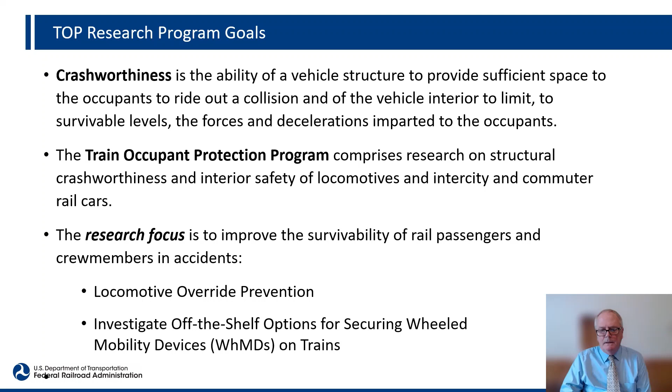Inhibiting override or underride is of concern to FRA. Locomotives are susceptible to override in train-to-train collisions due to their relatively stiff underframe structure compared to other rail equipment. Conventional anti-climbing structures can deform on impact and lose their vertical load carrying capacity due to fracture as they crush longitudinally. This can lead to ramp formation and increase the likelihood of override.

The photo on the left is an example of underride, in which the locomotive struck a standing train consisting of maintenance of way machinery at 23 miles per hour. The locomotive cab is crushed by the overriding freight equipment and the occupants were fatally injured.

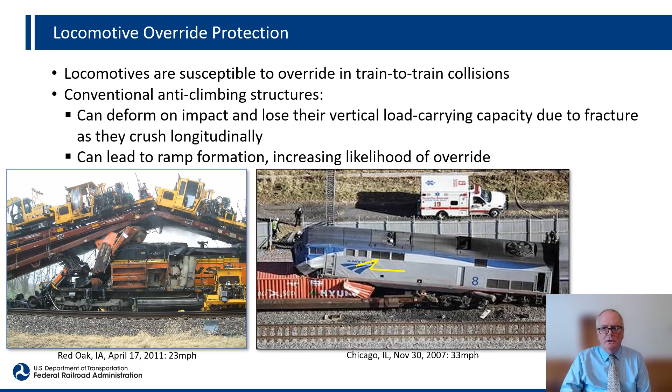The photo on the right is an example of override, where an Amtrak locomotive struck a standing freight train at 33 miles per hour. The yellow jagged line shows the shape of the underframe of the Amtrak locomotive, which deformed considerably, highlighting the forces generated in such collisions.

The purpose of our test was to demonstrate the effectiveness of two retrofittable crash energy management components on the front end of a passenger locomotive.

The components consist of a pushback coupler, which telescopes on impact to bring the vehicle ends together, reducing the potential for lateral buckling or override. The telescoping action is triggered at a load of approximately 675,000 pounds.

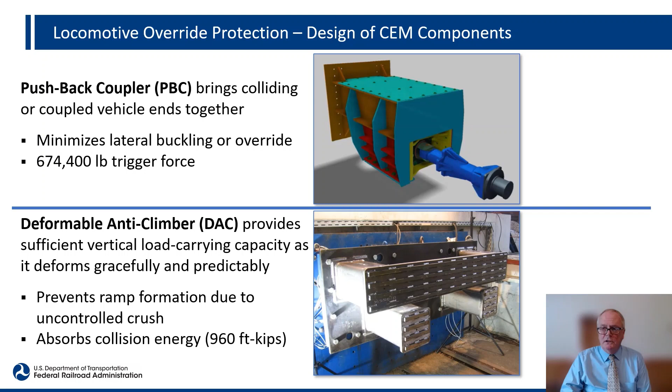The deformable anti-climber is a bolt-on feature with crushable tubes arranged at different heights to accommodate interaction with most types of rail equipment. The upper tubes are positioned to align with the underframe of locomotives, while the lower tubes engage lower floor passenger cars. In a collision, the tubes collapse and engage the equipment at the colliding interface vertically to inhibit ramp formation, leading to over or underride.

These photos show the results of testing and computer analysis of the individual components to confirm that performance met the specifications. The components were then installed on a locomotive and tested in two single vehicle-to-vehicle tests to further validate performance.

The upper left image shows the pushback coupler after impact, in which the pushback action forces a larger tube into a smaller one. Expanding the tube absorbs collision energy and causes the paint to strip off.

The upper right shows an overhead view of the deformable anti-climber. The top image is the collapsed test article, and the bottom is the computer simulation of the component test showing excellent agreement. The lower two figures show the sliding lug and the shear bolts.

Once the pushback coupler has been engaged and exhausts its stroke, the sliding lug is loaded until the shear bolts fail and the assembly slides backward under the locomotive.

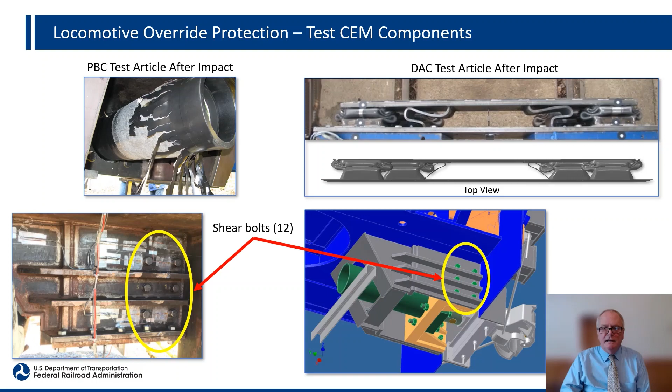This is a drone's eye view of the test, where we evaluate the performance of the pushback coupler and deformable anti-climber under realistic collision conditions.

The moving locomotive with the CEM components and two passenger cars containing the occupant experiments is shown here. The impacting train has been pushed up to speed and released at a location which will result in the desired speed at the impact location and approach from the left. The release point is slightly uphill and the train is traveling with no persons aboard.

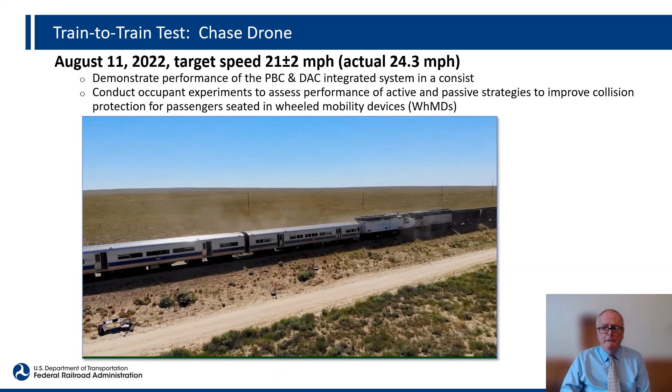The standing train is a similar locomotive connected to two freight cars. After impact, you can see that the two trains remain aligned, there is no indication of override, and the moving consists come to rest several hundred feet from the impact point.

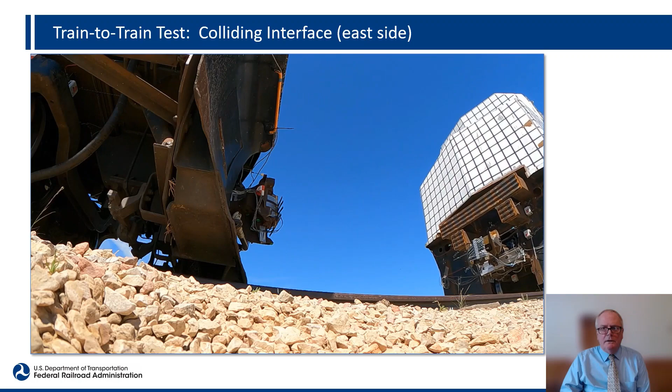This is a close-up view of the impact from a camera mounted on the ground. It's difficult to see, but this shows the couplers engaging, pushing back, and the translation of the sliding lug after the shear bolts have failed.

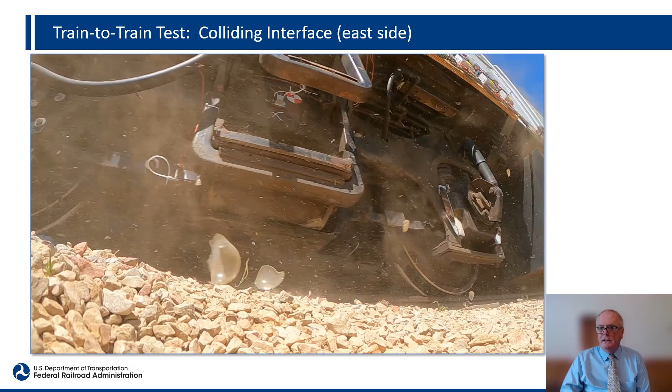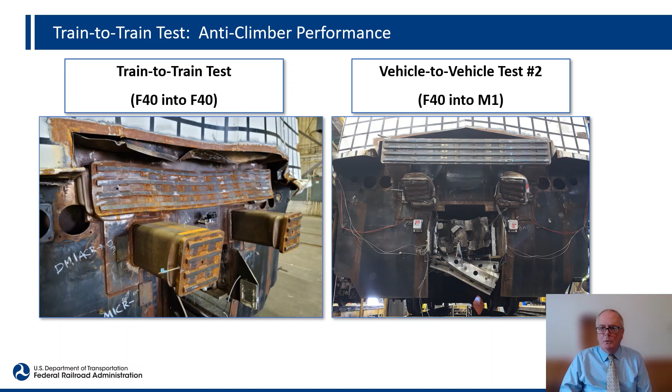Again, no evidence of override or impending derailment. These are views of the deformable anti-climber after the train-to-train test on the left and after the locomotive to passenger vehicle test on the right. This shows how the different sets of deformable tubes are engaged, the upper or lower, depending on the type of equipment involved in the collision.

Currently, there are no requirements for users of wheeled mobility devices to be restrained while riding in passenger rail cars. Effective securement or compartmentalization of wheeled mobility devices and the passengers seated in them can improve collision safety.

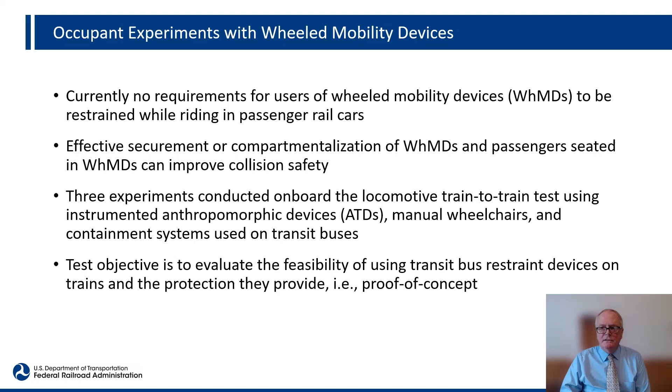3 experiments were conducted on board the train-to-train test using instrumented anthropomorphic test devices, ATDs or crash test dummies, manual wheelchairs, and containment systems used on transit buses. The test objective is to evaluate the feasibility of using these transit bus restraint devices on trains and the protection they may provide, just a proof of concept.

Since passengers travel at the same speed as the train, in a collision, passengers continue to travel at speed while the train decelerates. The speed at which a passenger strikes some interior feature is the secondary impact velocity. The larger the travel distance, the greater the secondary impact velocity.

Providing increased maneuvering space for wheeled mobility devices generally increases the impact velocity and the severity of secondary impact injuries during an accident. Therefore, it's recommended that passengers in wheelchairs are seated rear-facing with the wheelchair placed against a bulkhead wall or some other stiff structure to improve safety while maintaining passenger independence.

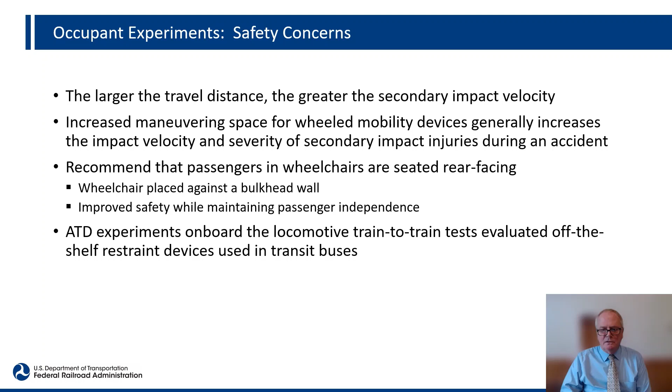ATD experiments on board the locomotive train-to-train test evaluated off-the-shelf restraint devices used in transit buses. The 3 experiments were arranged as shown here.

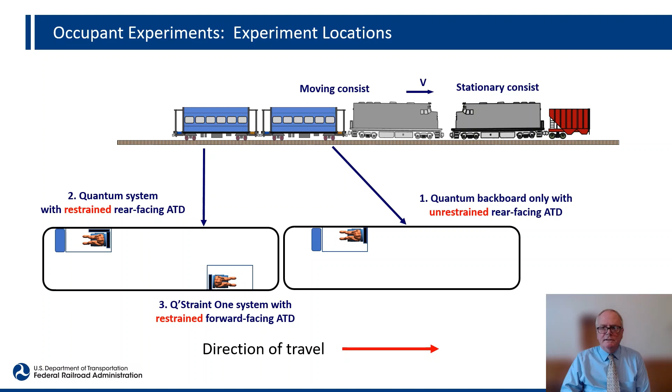The first is the quantum backboard only with an unrestrained rear-facing ATD. The second is the quantum system with a restrained rear-facing ATD, and the third is the Q'Straint One system with a restrained forward-facing ATD.

This is how the experiments looked before the test. The backboard-only option provides the most independence for the wheelchair occupant. No assistance is required to use this option. The ATD is seated in a commercial, off-the-shelf wheelchair.

The second experiment is similar to the first in that it uses the same backboard. However, rotating bars at the base of the backboard grasp the rear wheels of the wheelchair, and the ATD is restrained with a 3-point seatbelt attached to the chair and the car body.

The third experiment is similar to the second, except that here the chair is attached to the floor using J-hooks and straps. The ATD is also restrained with a 3-point harness.

Experiments 2 and 3 use what we call surrogate wheelchairs designed for testing, since the purpose of our test was not to evaluate the structural integrity of the chairs themselves. Also, options 2 and 3 will likely require assistance from a crew member.

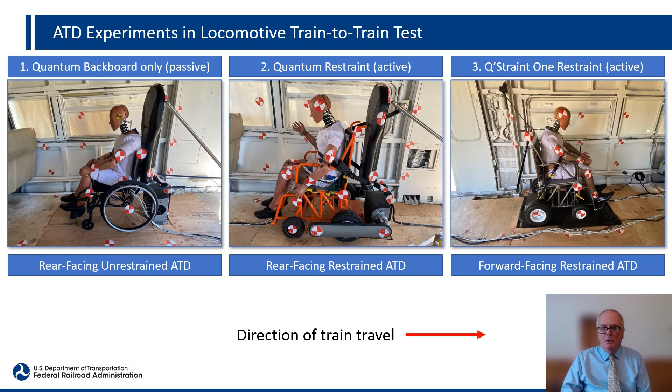This slide shows the response of the ATDs to the collision deceleration. The train is traveling to the right. The high-resolution slow-motion videos allow us to infer occupant motions during the collision.

As you can see, there is substantial vertical motion of the ATDs due to the passenger cars bouncing on their suspensions. However, all of the devices remained attached and the ATDs remained compartmentalized, meaning there was no excursion from their initial positions.

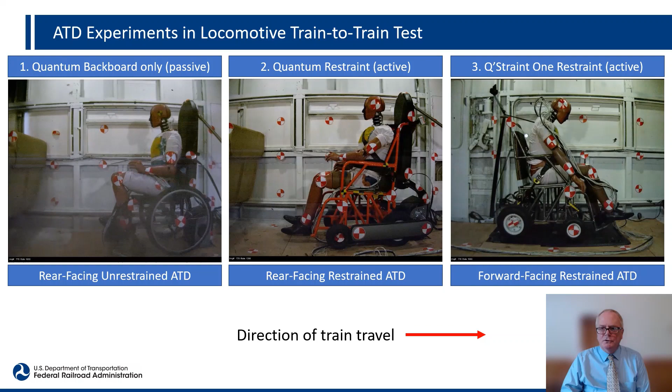The test results can be summarized as follows. The pushback coupler deformable anti-climber integrated system performed as intended. All the CEM components activated and absorbed collision energy as designed. The shear bolts failed, and there was no evidence of vehicle-to-vehicle override.

The ATD experiments were similarly successful. Wheeled mobility devices remained constrained throughout the collision event, and all the human injury criteria were met.

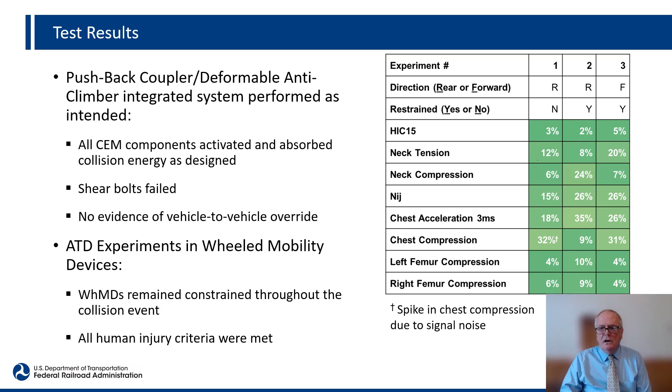The table on the right shows the applicable human injury criteria. Based on the sensors in the ATDs, we derived the injury metrics, all of which were well below the allowable limits.

The next steps for this project include a deep dive into the enormous amount of data that we collected during the test, and using the data to refine our computer models so we can investigate different collision scenarios that we were not able to test.

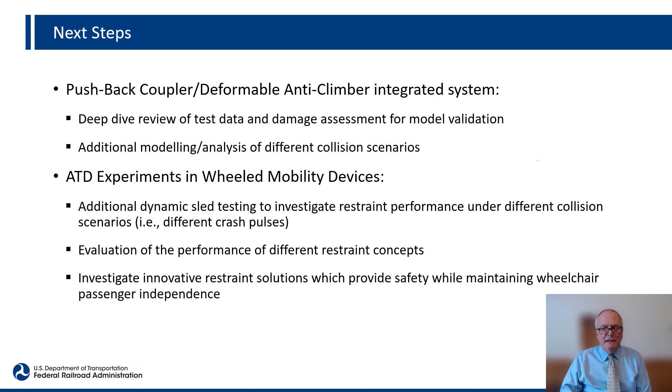We're also looking to perform dynamic sled testing to investigate the performance of the restraint systems under different collision scenarios, or different crash pulses, different speeds, while we investigate innovative restraint solutions which provide safety while maintaining wheelchair passenger independence.